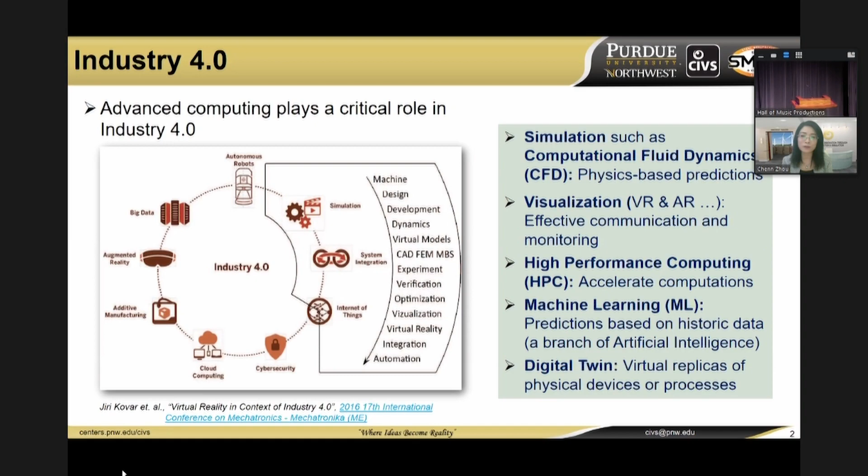introduction. We all know we're in the exciting time for Industry 4.0. We also call this advanced manufacture or smart manufacture, or some people even call it digital transformation. Basically, people also call this the fourth industrial revolution. So in this Industry 4.0, what is important is... and of course, simulation is getting more important because when you apply that

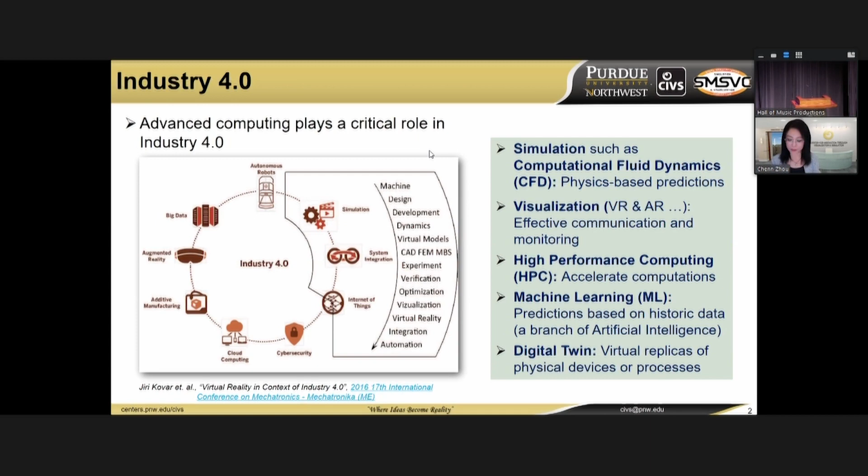Thank you. So I think you heard this part for how simulation visualization plays an important role for Industry 4.0. So then in 2009 we formed the Center for Innovation through Visualization and Simulation, to focus on applied research and to integrate simulation and visualization together. We have been working with more than 160 organizations, more than 460 projects. But then, industry got together, and they wanted to have a specific consortium to develop and apply simulation and visualization technology to improve the steel industry's competitiveness. So currently we have 15 industry companies and focus on 8 research areas, and from those areas, we actually pick specific projects. So I'm going to show some of those projects.

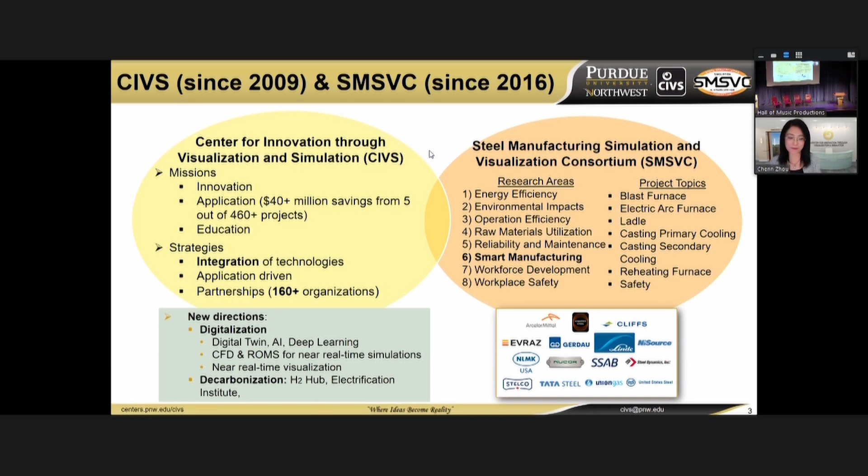So one thing I want to emphasize is about 5 years ago, digitalization became very important. So that's exactly what we're doing, focusing a lot on physics-based and data-driven approaches. But then in the last 3 years, decarbonization has become more and more important. So our new focus for both the center and the consortium is on digitalization and decarbonization.

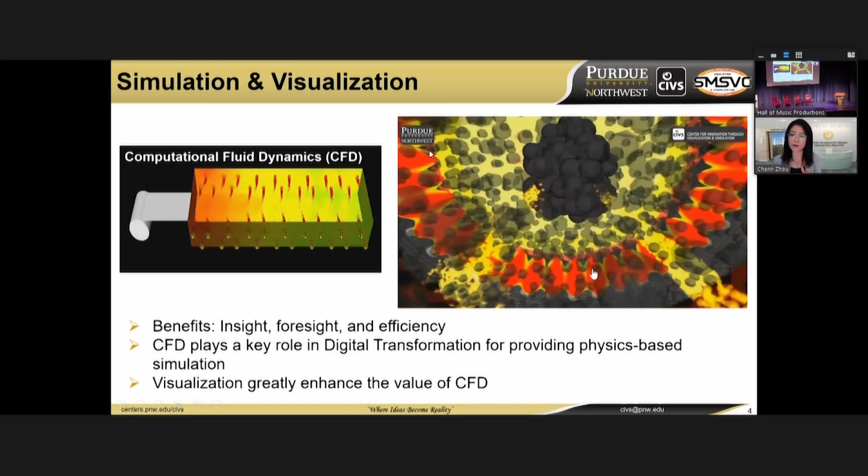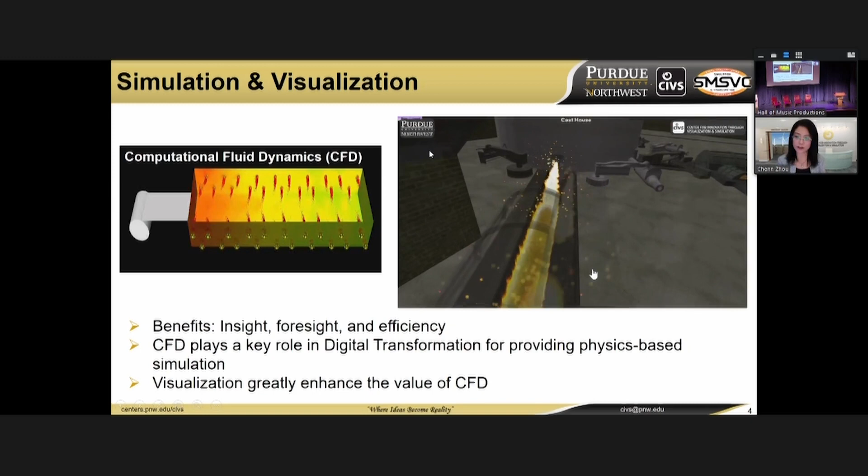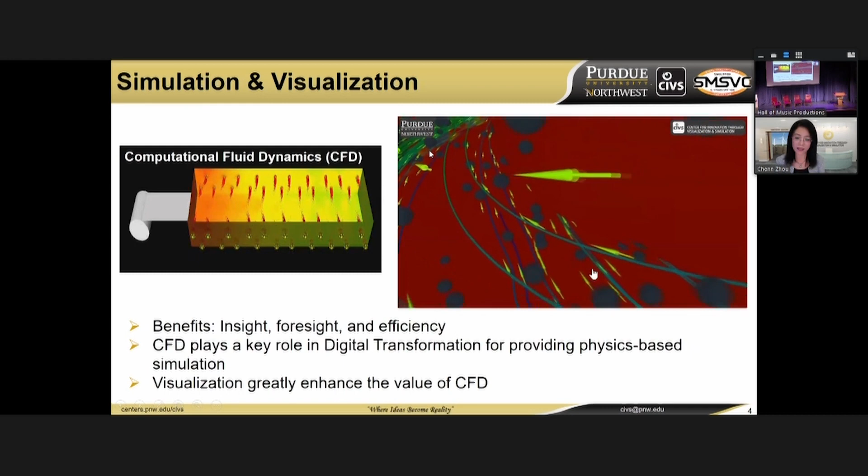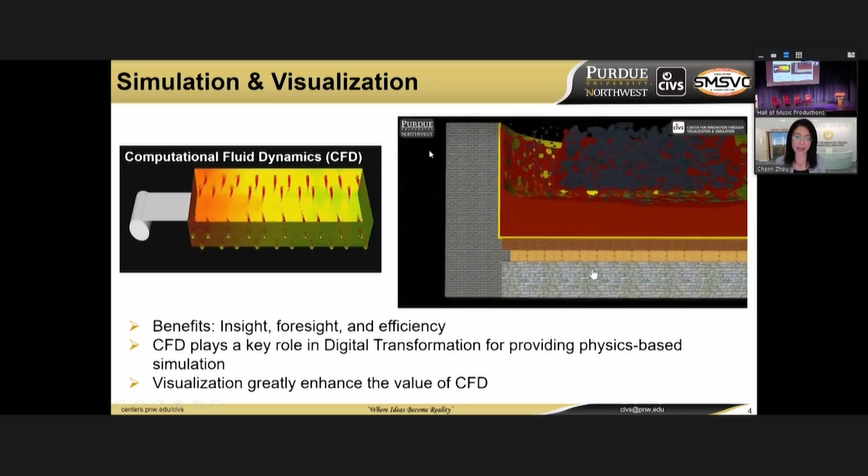So to give you a little more idea about the simulation, what we do basically is computational fluid dynamics. When we use advanced visualization, you see this figure, you're actually inside the blast furnace, as the video shows. Inside the blast furnace, you can look at the data generated by computational fluid dynamics, the CO2 emission, temperature, like a software sensor. So by coupling this simulation with visualization together, it provides great advantage for insight, foresight, and efficiency. Basically, CFD gives you physics-based data, and visualization can help people understand, easily communicate, and greatly enhance the value of CFD.

Now, let's talk a little bit more on CFD because this is high fidelity computing, and it needs a lot of computing power, but also a lot of effort. So I just basically summarized it to a few steps.

When you solve a problem in industry, you need to start with geometry, and nowadays it's much easier with AutoCAD and everything. But then you need to make a mesh. You need to have boundary conditions because you're solving non-linear partial differential equations.

You need boundary conditions, and those boundary conditions need to be from industry. Then after that, you need to convert those partial differential equations into algebra equations through iteration. After you get the results, we visualize and we need to validate, because validation is the key. Otherwise, it's easily provided - people say garbage in, garbage out.

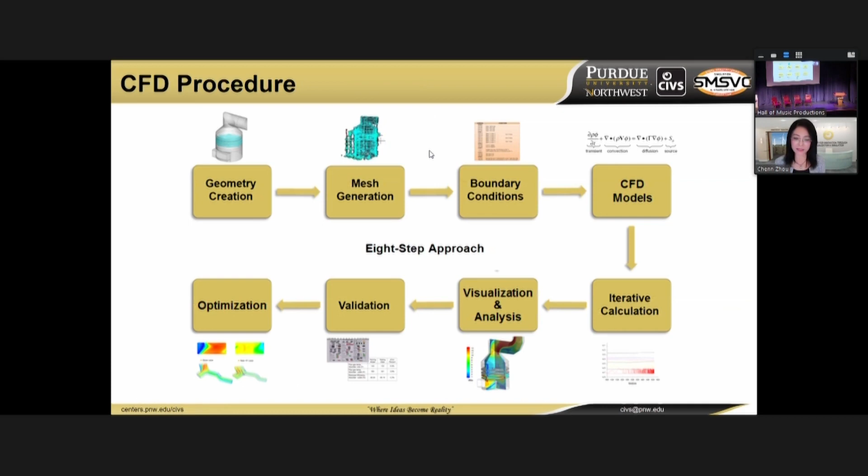So once the results are validated, you can run many, many 'what if' scenarios to optimize the performance of the process. That's basically for every project - we need to go through those steps.

Now, as I say, when we integrate simulation with visualization together, it greatly enhances the value. Furthermore, when we put the CFD and visualization, but also sensor data and reduced order model, machine learning, all together,

actually we can really make a very efficient, effective, and economical tool for real-time visualization, very quick offline modeling, and quick decision making, and also high fidelity analysis.

So this way you can test out, for example, hydrogen injection, or electrification, and also the whole virtual furnace could be used for virtual training.

So, you probably know this quote a lot: without data, you're just another person with an opinion. Now, I want to say with computing, simulation, we actually provide the physics. So it's true, without physics, you're just another person with an opinion, right?

Or data. So by doing this, we really focus on providing a physics-based, data-driven decision to answer many what-if questions, and you can reduce the risk and shorten the cycle to develop new transformative technologies. And you can provide real-time monitoring, control, and more effective training.

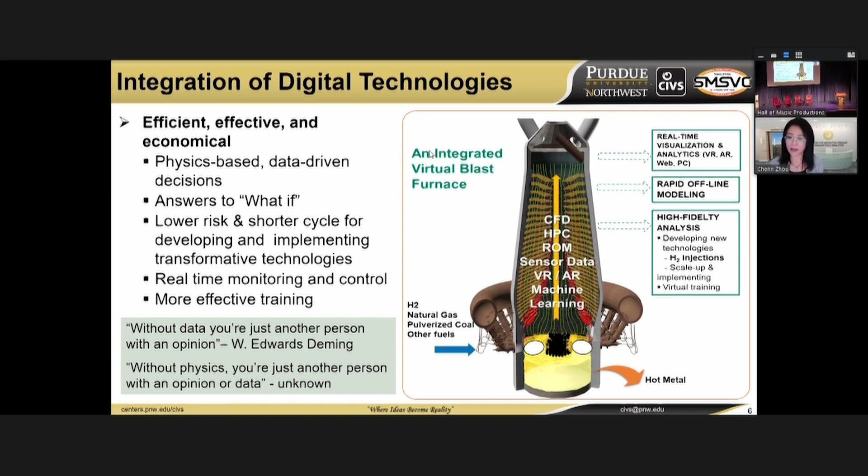So I'm going to start giving you some examples. Before that, I want to emphasize again the application and impact. For the application side, I always tell people, your imagination is the only limitation.

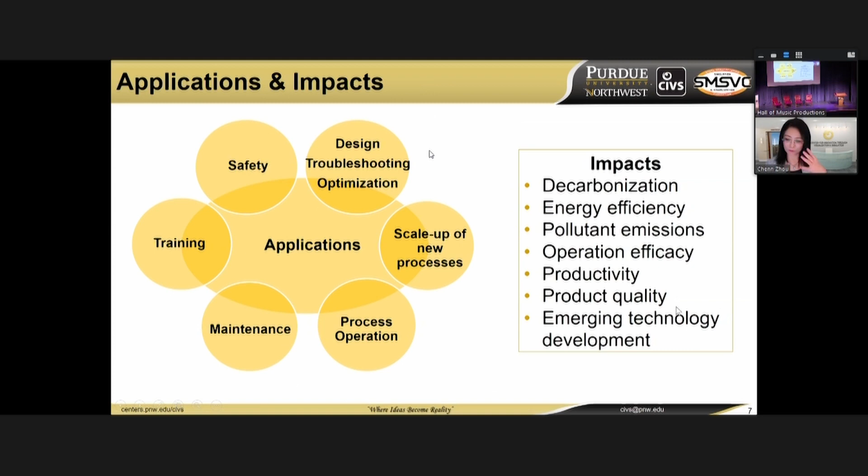Specifically for industrial application, we have used this kind of technology to help industry do design, troubleshooting, optimization, scale up new process, operation, maintenance, safety, and training. And the specific impacts are very important: decarbonization, energy efficiency, and you can list many more impacts.

First example is our signature project for blast furnace. We started this research about 20 years ago, only for CFD simulation, computational fluid dynamics. At that time, the visualization technology was not advanced yet.

So we actually developed a very comprehensive multi-physics, multi-species reactive model. We divided the whole furnace into 3 parts, because if you want to do the whole furnace, computing time, even with high performance computing, would be very long. So we found a so-called sectional approach, and we do it section by section - basically we divide into 3 sections.

From the bottom, we call it hearth, then middle is raceway, top we call shaft. Each section can work standalone, but also coupled together. Especially now, we want to try hydrogen injection and electrification, for example plasma injection, for decarbonization. So this kind of model is very important and very helpful.

So since 2002, we have also combined this now with visualization and developed a virtual blast furnace. Actually, we have an industry partner who told us it saved cost significantly and reduced downtime. As you see here, one industry furnace saved $8.5 million per year and reduced downtime by 50%.

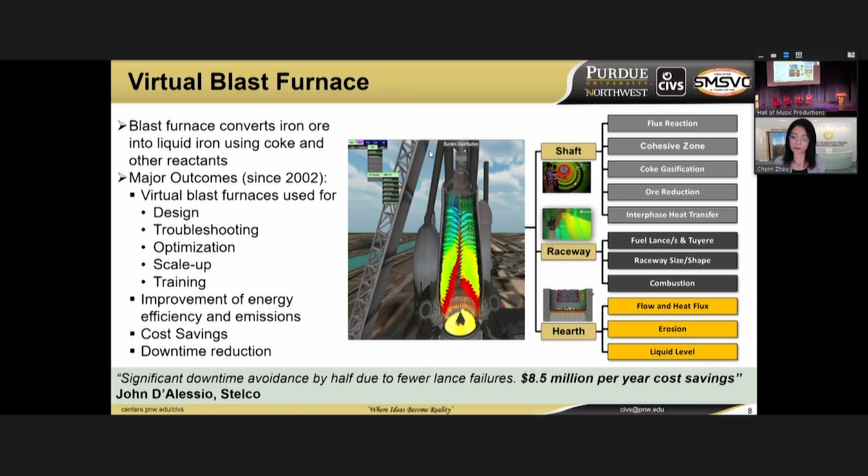That is very significant. So now we're using this model developed over all those 20 years, we continue to improve and also make advancements. So those are some examples, the recent examples.

So we helped Cleveland Cliffs to design and implement the injection of coal with natural gas. Before this, with the emphasis on decarbonization, people already used coal and natural gas to replace coke, because coke is not just expensive, but very toxic for the environment.

So now, a few years ago, we helped design how to inject the coal and natural gas, which actually increased the coal combustion efficiency by 25%, and the solution was implemented.

Then we also worked on trying to help carry the coal into the furnace using natural gas. Normally they use nitrogen. So again, by doing CFD, we help evaluate many scenarios and find the optimum solution.

And that one is in the implementation phase, and it can increase productivity by 2.5%. Also, meantime, we actually solved one of the issues. For example, this figure is clear, okay - so injecting the coal and natural gas and getting it burned all the time, they could fail.

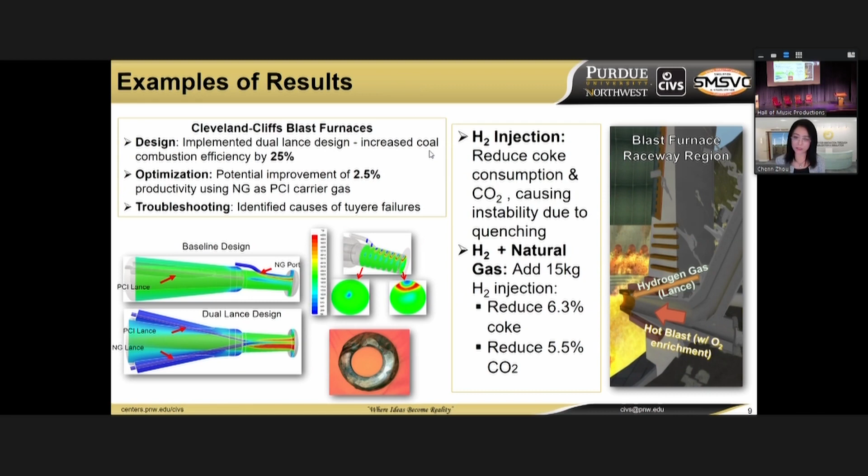Because the blast furnace converts iron ore into liquid iron, that additional reaction can suck in heat and cool down the furnace, possibly causing a shutdown. So we did a quantitative evaluation of how much hydrogen you can inject to keep a specific furnace stable, and also what the CO2 reduction would be. For example, in one furnace, we found that adding 15 kilograms of hydrogen injection can reduce CO2 by 5.5%. This research is still ongoing.

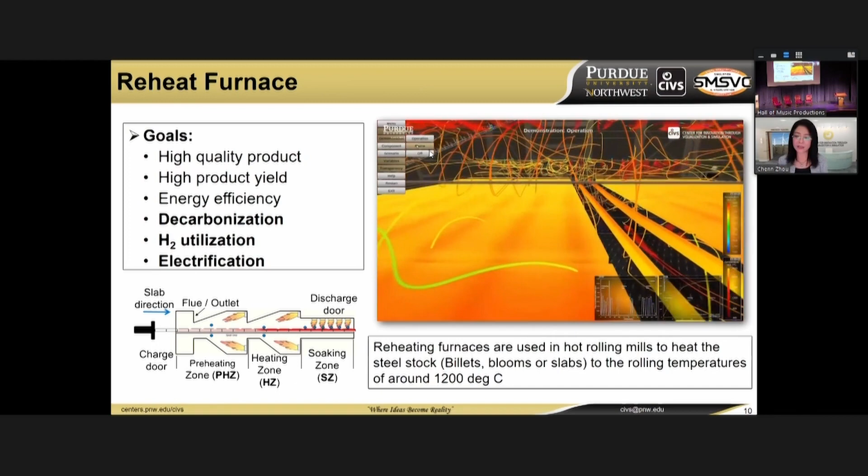So let me move to another example, the reheating furnace. The blast furnace is the beginning of the integrated process, using iron ore to make liquid iron. Then you go further down to steel making, producing liquid steel. After that, what they call rolling mills require the steel plates to be heated up for further rolling.

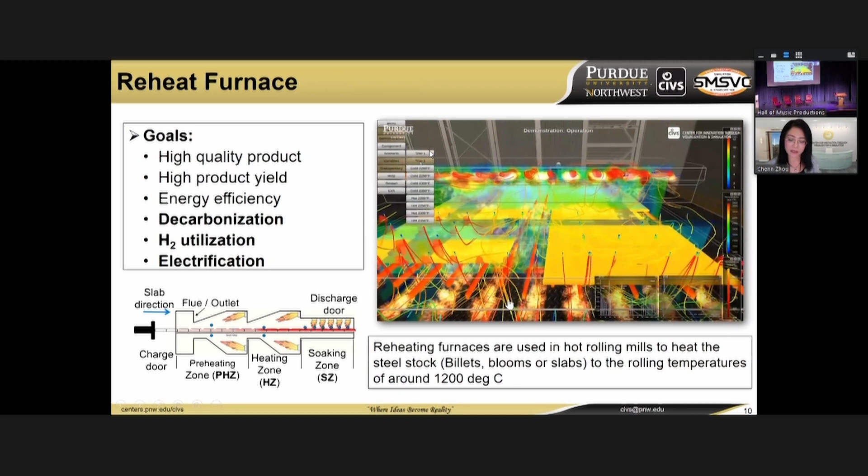So what you see in this movie is actually inside a reheating furnace. The common issue is energy efficiency and the uniformity of temperature distribution. By doing the CFD simulation plus visualization, what you see here is a real furnace. We actually connected it with sensor data for almost real-time monitoring.

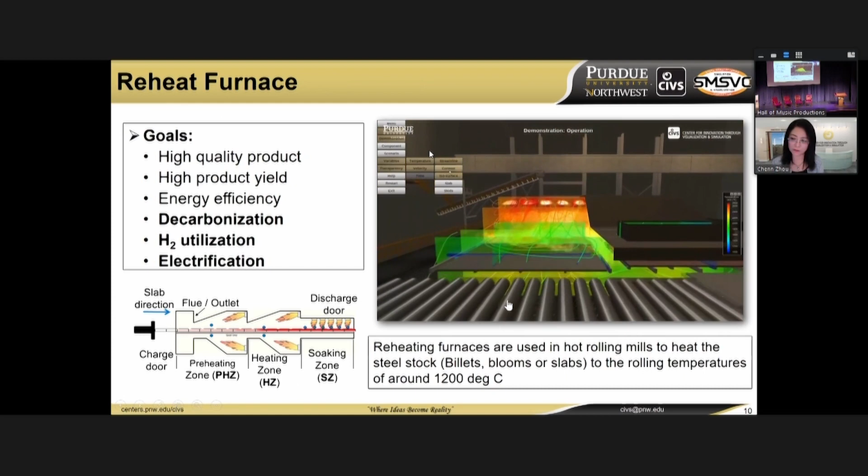One of the big issues for this furnace is that they have requests for different grades of steel. Each time the grade is different, you have to change the operating condition. So with these two tools, we help the industry do real-time monitoring and operation guidance.

So again, currently one of the bigger hot topics is hydrogen injection. We tested hydrogen injection into the reheating furnace because again, the chemistry is different compared to normal natural gas injection, so your heating rate is different. The question is, how much hydrogen do we need to replace natural gas while keeping the same heat flux?

How does that affect the temperature inside the furnace and in the slab? How does that impact the uniformity of temperature and the steel quality? Since time is limited I can't give too many details, but we used this CFD simulation and investigated multiple scenarios.

One example: we found 16% higher temperature in general for hydrogen injection if you keep the same amount. But otherwise, if you want to keep the same heat flux, you can use less hydrogen. And of course, for CO2 reduction, if you use totally hydrogen, you don't have CO2, right?

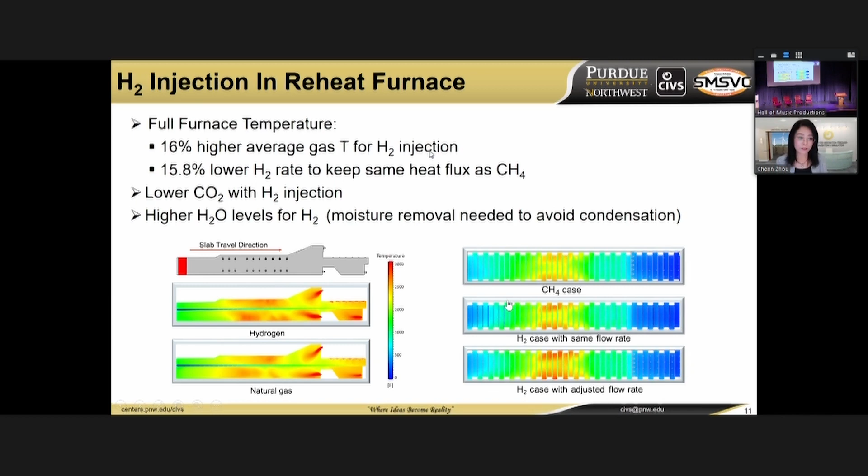This is another practical example already implemented, but I can't tell you exactly what company or the process because it's confidential information. But I can tell you this is a boiler, and this boiler fires multiple fuels with different compositions. The company wants to mix in hydrogen for decarbonization purposes, together with other fuels.

So how much can we put in? Again, you need to know how that affects the process. We tried many different cases, and you can see here standard operation without hydrogen versus with additional hydrogen, and obviously the temperature is higher.

So they want to make sure there are no issues with overheating the boiler wall, because if temperature is higher, the boiler needs to cool down, and otherwise that fails and you get hot spots. So we were able to identify how much hydrogen fuel can be added without overheating the boiler walls.

We gave the range of the operating conditions, and the company already installed it, followed the guideline, and it works very well.

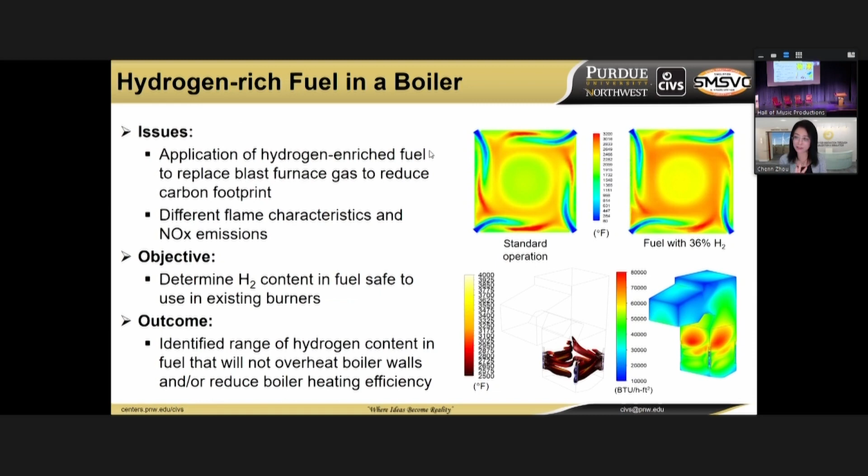Another example: people want to try hydrogen by all means to replace natural gas in any possible combustion process. So this is another example, gas turbine combustion. We tried this, and you can see some very preliminary results, but very promising.

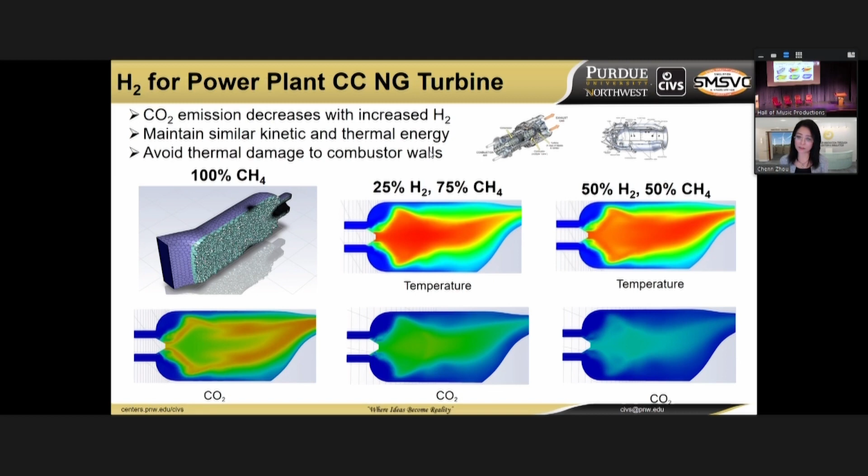If you have 100% natural gas, we call that baseline CO2 emission. You add 25% hydrogen, and you can see the color change—red means higher CO2—so the CO2 emission is less. Then if you add 50%, this trend shows very good qualitatively, but our simulation can give you quantitative analysis on this. You also want to look not just at CO2 emission but temperature distribution, to make sure there's no thermal damage on combustion walls.

So let me move on. Electric arc furnace is a big way to reduce CO2 for the steel industry. Right now in the United States, we're ahead of other countries—there's 70% electric arc furnace in the whole steel industry now. Another 30% is blast furnace related.

EAF is great for CO2 reduction, but of course there's some limitation—you cannot use 100%. However, you still want to optimize electric arc furnace operation. It's very complicated, like a blast furnace, so we use the same approach: divide the whole process, multi-physics, into sections, but this time by operation. The operation-wise: an electric arc furnace uses the arc to heat up material.

In this case, you put mostly scraps. You preheat the scrap, then melt it so solid becomes liquid, then you do more refining to make sure the quality of the steel. So we divide again into multiple models, each one capturing the major physics and chemistry, then integrate them together. Again, each one can work standalone but coupled together. This has now become state of the art. Once we started this modeling six years ago, there was no such comprehensive CFD model in the world.

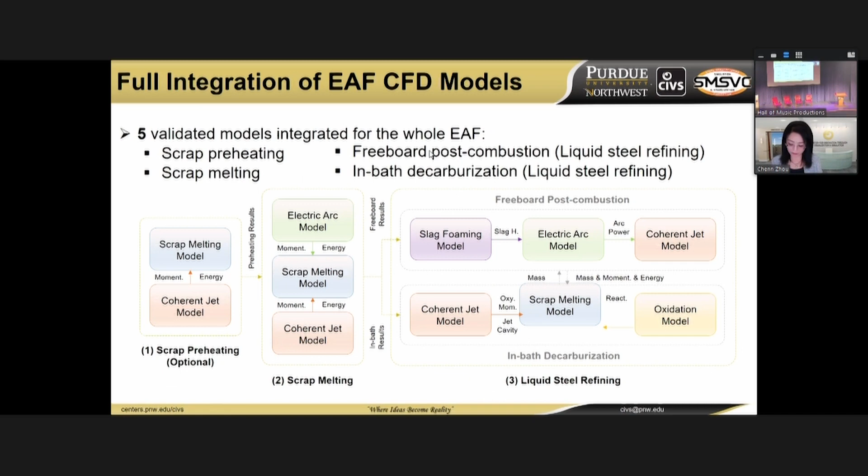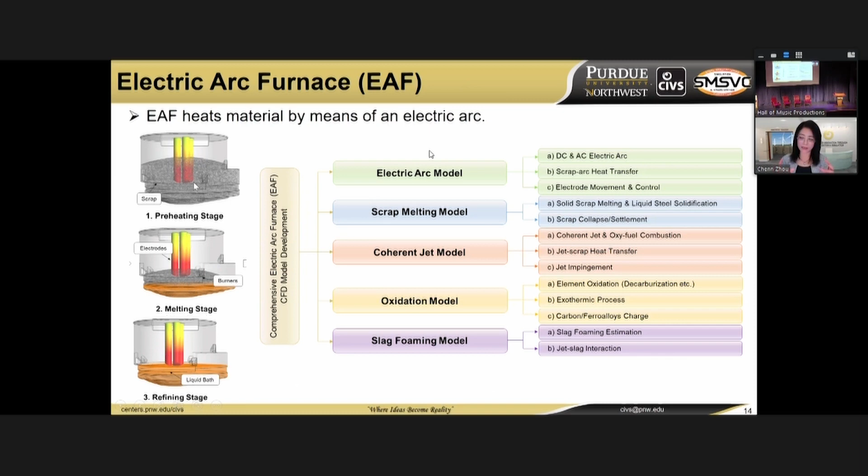With the model we developed, we did the simulation for the whole electric arc furnace. This wall heat-up isn't just a temperature issue, it's related to the whole operation. What we found is: when you have this electric arc, they pull it down into the solid—they call it scrap. How much you put in will directly relate to the heat generated, and that heat will propagate into the whole system.

What we found is this arc—how much it's immersed into the liquid or solid—will directly affect the wall temperature. Our quantitative analysis showed that if arc power increases, your arc will provide more heat and cause overheating. So we found the operating window: if it's larger than 85.1 megawatts, you will have overheating. But you don't want less to always be better—you also want to maximize heat absorption. So there's also a lower limit: you want to make sure you operate above 59.

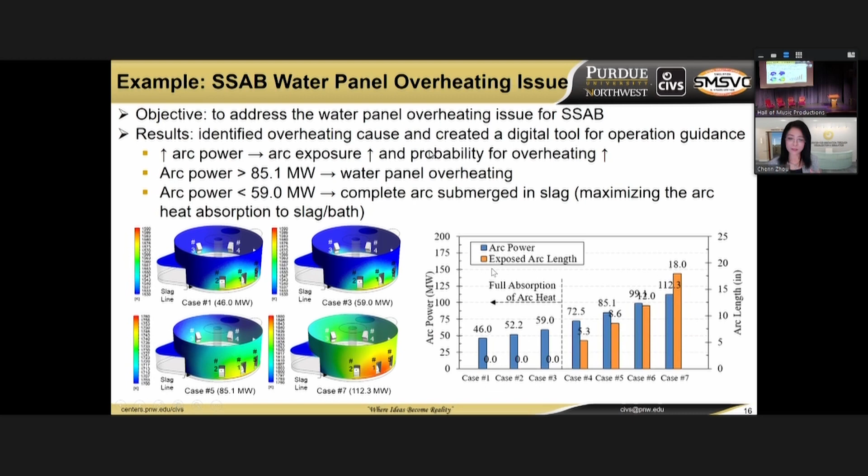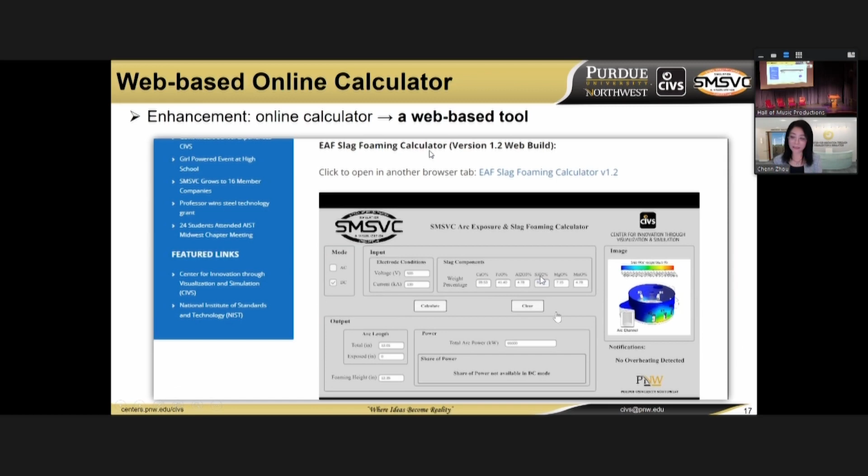Industry validated this and implemented it. What the industry wants is an online, web-based calculator. So we ran many simulations and made it into an interface. The operator or engineer can just input the operating condition and see whether that condition will cause overheating or not. In this case, you see the overheating issue—it gives a warning. Then you change the condition and see, okay, we're safe. This gives a very user-friendly tool, pre-calculated for many cases.

That's the trend of what industry wants—they want to really apply this to operations. They always want us to develop an online calculator, or in the blast furnace case, not only do that online, but actually use machine learning to build a reduced-order model based on CFD simulation. Let me move on. I talked about the steel industry, but our center actually works with multiple industries.

This is a local company called Dwyer. They make flow meters and are worldwide famous for flow measurements. They had a challenge: they developed a new type of measurement using electrodes to calculate fluid velocity.

But they found that this calibration is very unstable, time consuming, and not even accurate enough, and they didn't know why. So we used a very high fidelity, high order turbulence model to calculate and find out what's going on, focusing on a very small area near the tip.

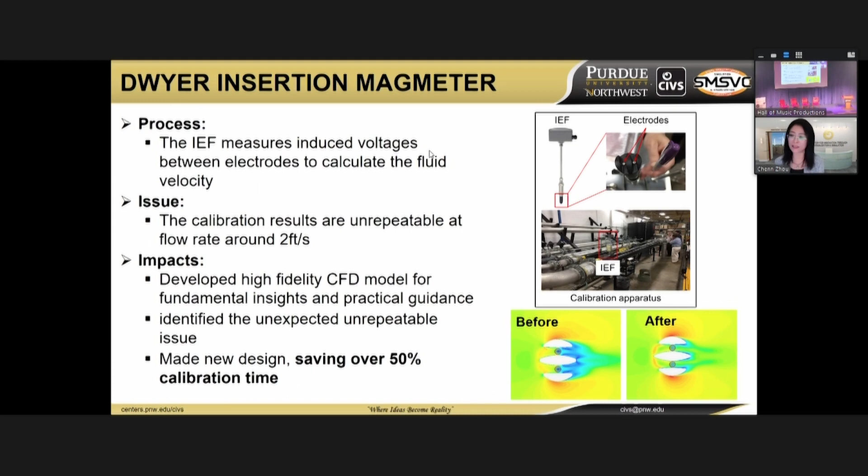It's very exciting. Another example, also very exciting. As I mentioned earlier, this kind of technology, simulation plus visualization, is a great tool for scale up.

The Department of Energy did a quick research and found that most new technology development fails at the last stage, commercialization, because if you have a process in operation, industry is very reluctant to try new things without being sure it works. So the DOE fully recognized the advantage of this tool.

We have a project from the Department of Energy Advanced Manufacturing Office to help industry, called Carbon Tech. They have a new process to make iron nuggets, using biomass to replace coke.

Coke is expensive and toxic. So this process was designed to produce high quality pig iron nuggets, and significantly reduce CO2 emission.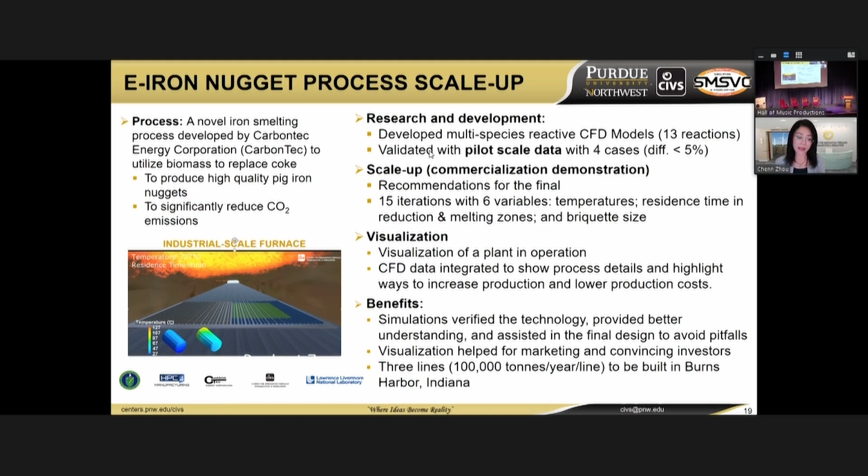Now, because of COVID, things are slower for commercialization, but they've already identified the site in Burns Harbor, Indiana, to build a full scale plant. This is a great example of how simulation and visualization can be used for scale up.

I've got 2 minutes, perfect timing. To summarize, I truly believe advanced computing is key for our future, not just for steel, but for all advanced manufacturing. Digitalization and decarbonization will be more and more important, and that's why advanced computing plays an extremely important role.

Specifically, what we do for simulation and visualization, combined with data, sensors, and machine learning, I truly believe this will provide a physics-based and data-driven tool to help industry for a greater future.